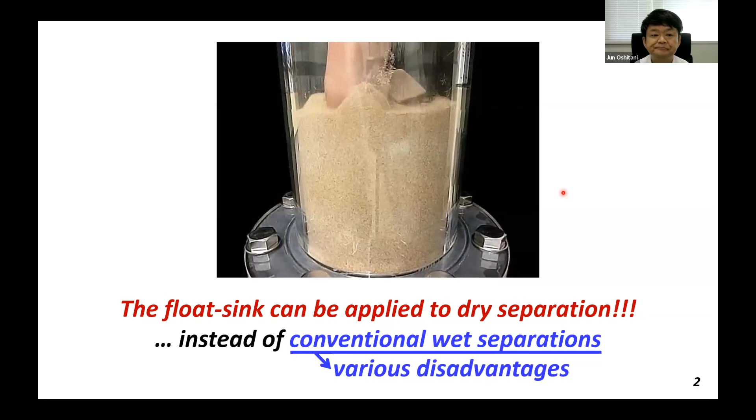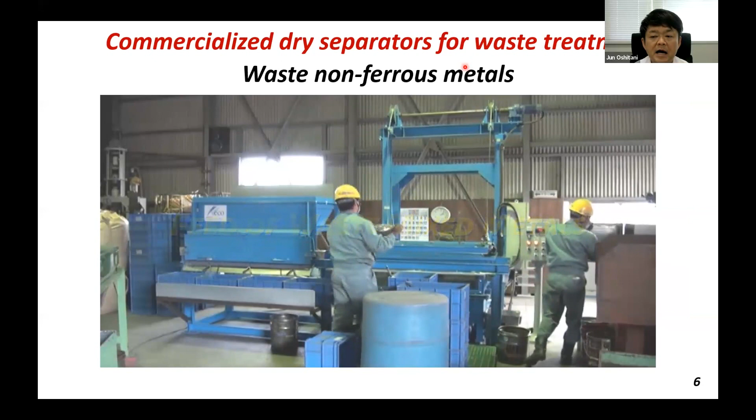Let me show you a movie of semi-automatic separators for non-ferrous mixed metals. To separate aluminum and copper zinc, they use black powder like this. What do you think this is? This is iron powder to make a higher separation density. The floated aluminum is recovered by hand, like a cooking chef. So this separator is relatively cheap.

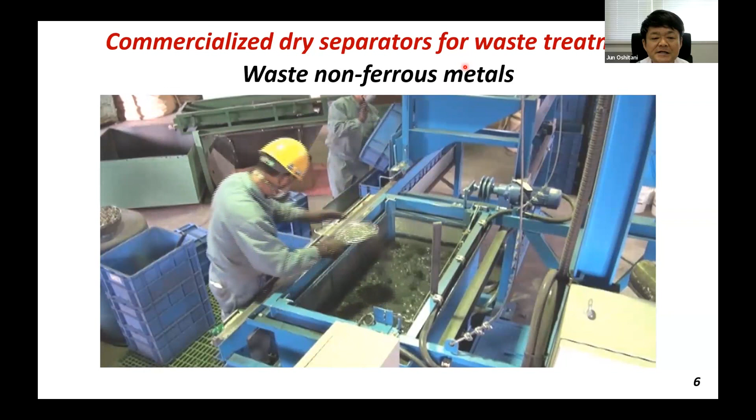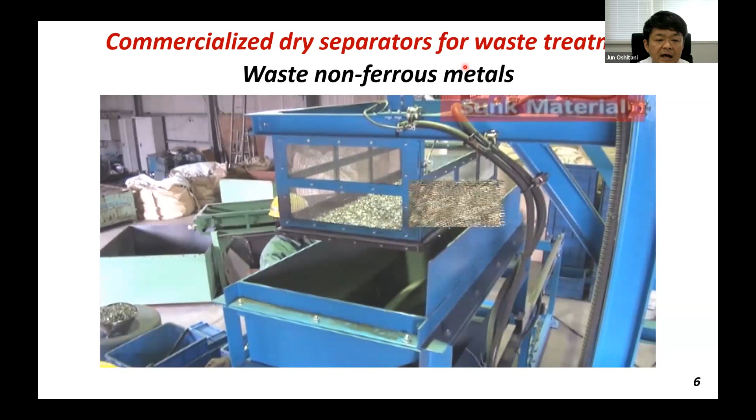This is the floated aluminum. For the sunk copper and zinc, a cage, a basket, is pre-installed at the bottom, and automatically lifted up, and the slider is moved by hand, and the bottom mesh plate is opened to recover the sunk materials. These are reused as materials.

Nagata Engineering is the partner company.

And we also applied the dry separation to mineral processing with George. We have collaboration since 2008. Actually, we met in 2005 in Terrigal, you know. Anyway, we're good friends for a long time. I visited Melbourne with my family, and George visited my city, Okayama, and we love karaoke.

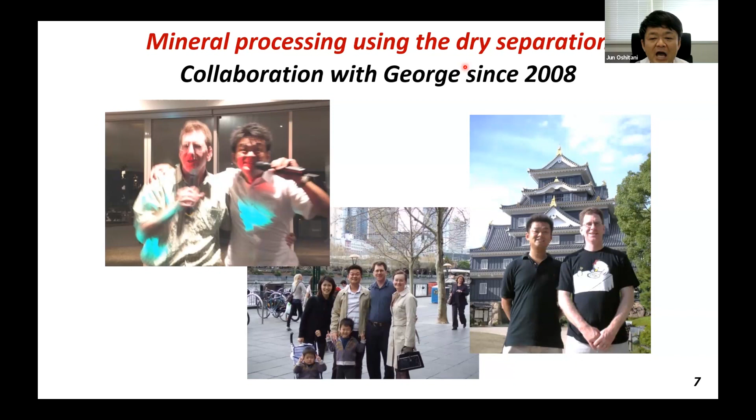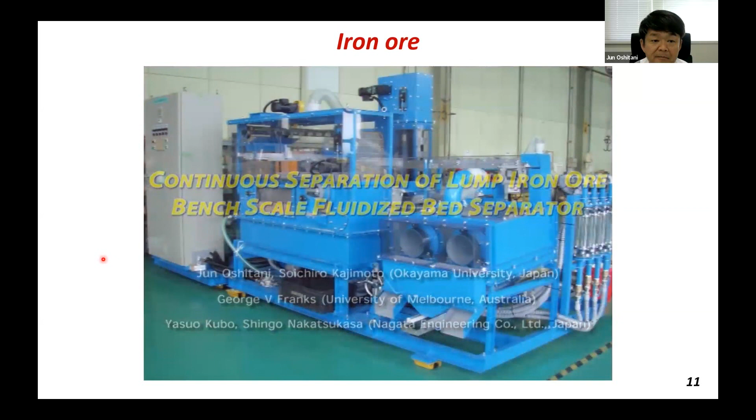I'll talk about it later. This is a bench scale dry separator for mineral processing. We got lump iron ore from an Australian big company and carried out the separation. This movie was made by partner company Nagata. This is a feed of iron ore.

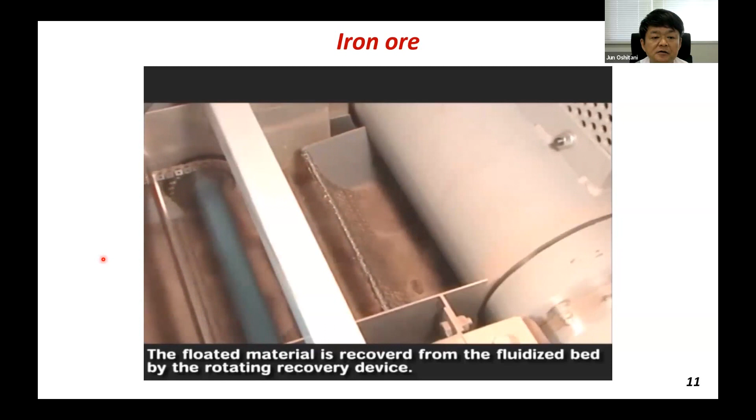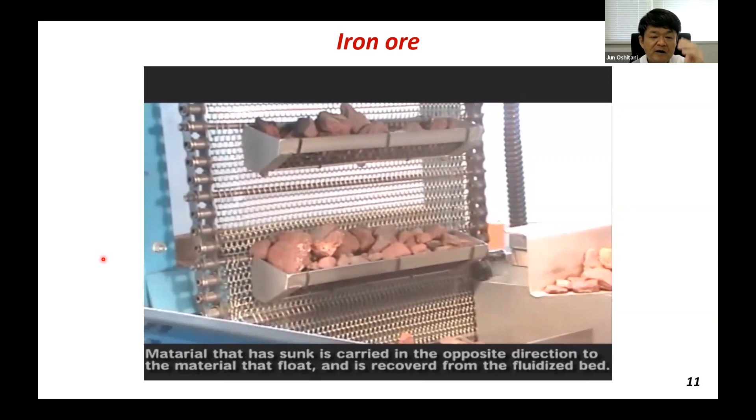Here we use a mixture of silica sand and zircon sand to adjust the separation density. The floated stones are recovered by the rotating basket. And the sunk heavy stones are recovered by a small cage. The cage moves at the bottom and partially moves at the wall. There are some powders attached to the stones, so they are removed by the trommel. These are the discharge of the separated ones.

We carried out the chemical analysis, and we found the separation efficiency is almost the same as that of conventional wet separation.

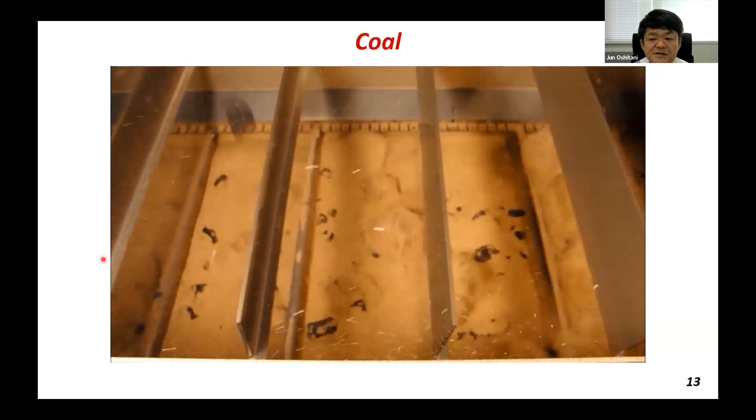We also carried out separation using lump coal. These are floating combustible coal recovered by rotating basket. And sinking silica stones are also recovered by the small basket and treated by the trommel.

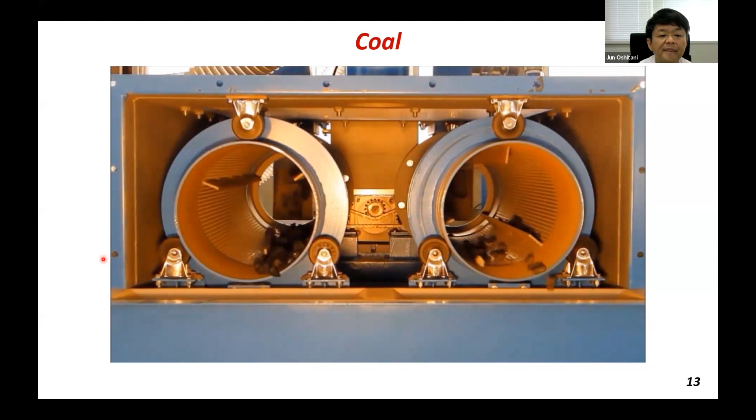These are the floaters and sinkers, separated enough.

Let me talk about our fundamental research entitled Float Sink of Large Objects in a gas-solid fluidized bed, different from that in a liquid. The float sink in the fluidized bed looks like that in water, so we had a question: is this based on Archimedes' principle? Our answer is mostly yes, but sometimes looks no.

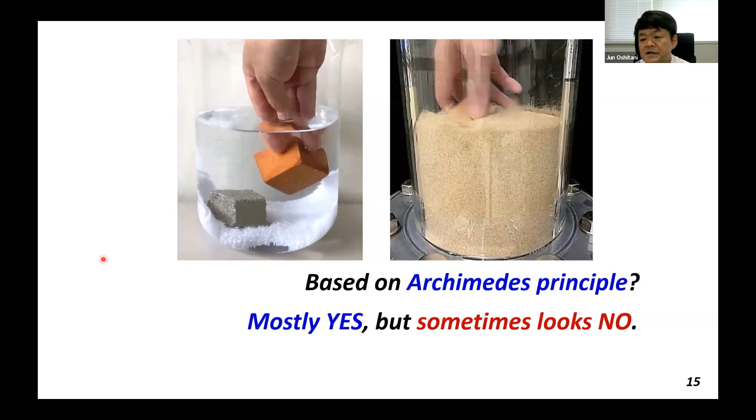Today, let me show you three interesting phenomena. The first is anomalous sphere sinking at the air velocity just below UMF. The UMF is minimum fluidization air velocity. So when the air velocity is above the UMF, as I've shown, the float sink occurs.

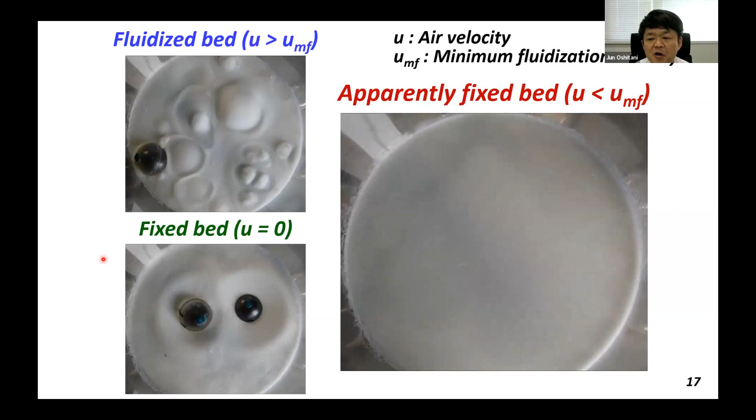Of course, it does not occur at a fixed bed. Here, it looks like a fixed bed, but float sink occurs. Air velocity is just below the UMF, so it is like an apparently fixed bed.

Very interesting, so we carried out more experiments to know the details. Glass beads were put into the container. The air was put through the bottom as U by UMF is 0.95, just below the UMF.

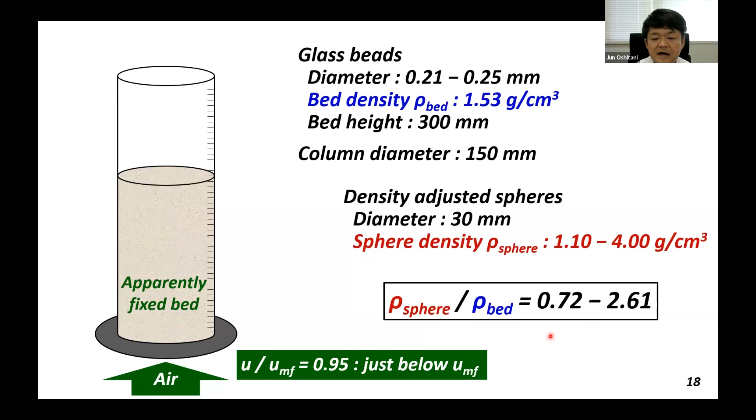Various density spheres are prepared. The density ratio was like this range. The sphere was put onto the bed surface like this. Video cameras are prepared, then the sphere sinking was recorded like this.

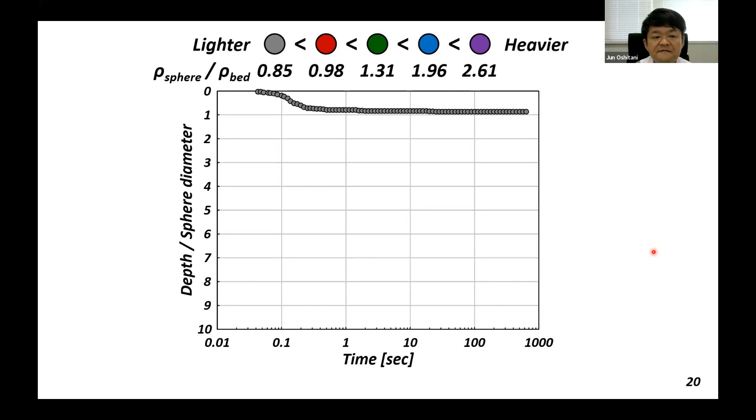And the time dependence was analyzed, 0 floating and 10 sinking. This is the result: light sphere gray floats and the heavy sphere purple sinks.

Blue and green: the depth becomes smaller with decreasing the sphere density. So red has to be between green and gray, but finally between green and blue. Surprisingly, a lighter sphere red sinks deeper than the heavier sphere green.

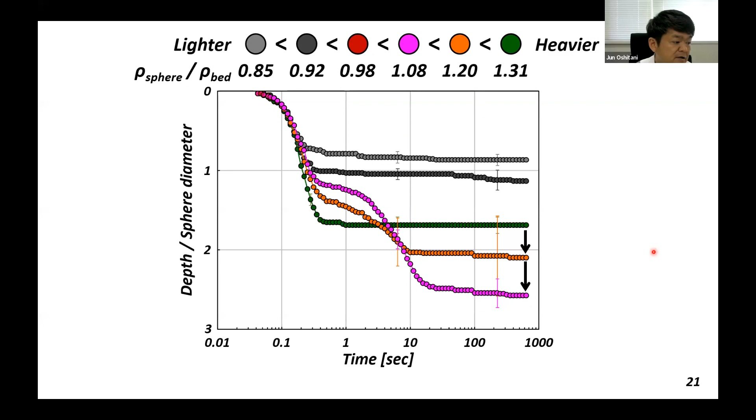We also carried out the experiments in the yellow region, light gray and heavy green. Light orange deeper, light pink deeper, and lighter red also deeper.

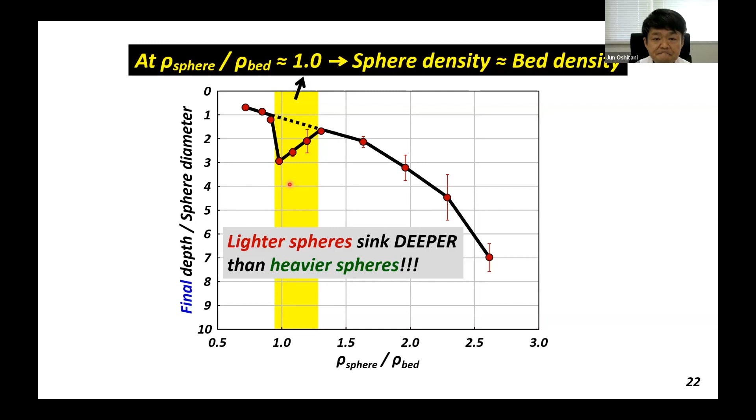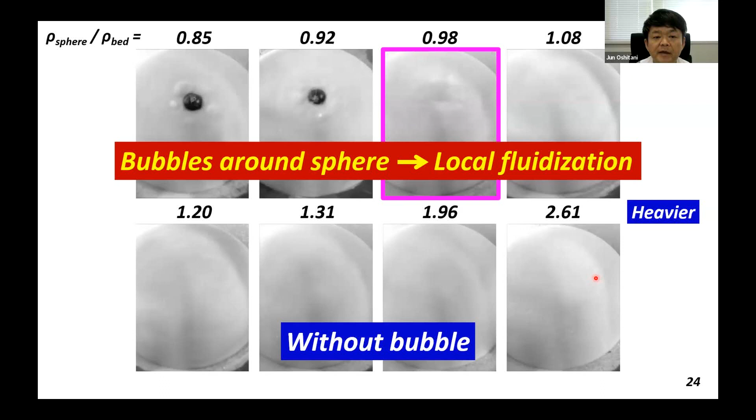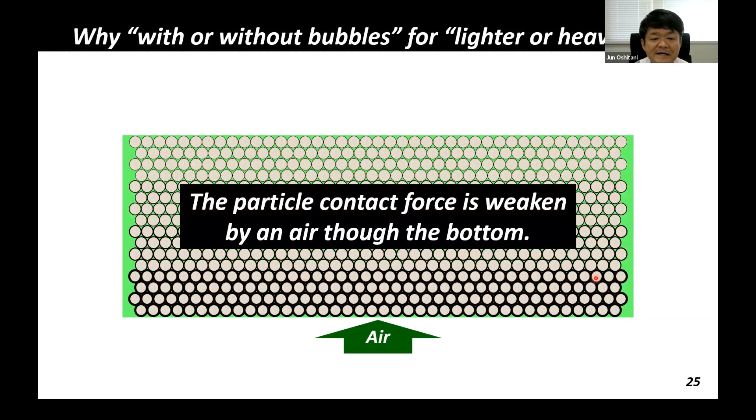Then we have a question: why with or without bubbles for lighter or heavier? Let me talk about the possible mechanism. This is the powder bed. Particle contact force is larger at the lower layers, but the force is weakened by air through the bottom.

In case of lighter sphere, the particle contact force is not changed. The air comes outside at the bottom and joins together. So here, the air velocity is larger than UMF, then bubbles are generated locally.

In case of heavier sphere, the particle contact force below the sphere is enlarged due to heavy weight. So the air goes up far from the bottom, and there is no local increase of air velocity, so bubbles are not generated.

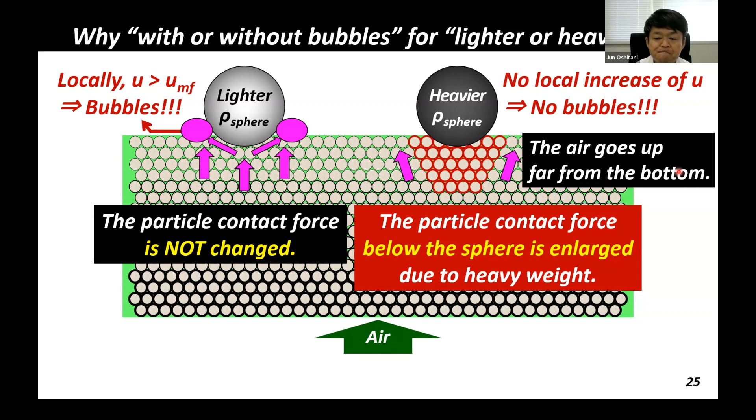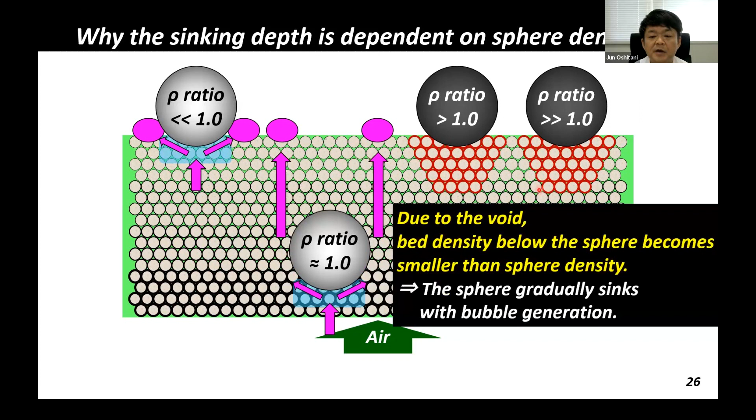But in case of density ratio around 1.0, due to the void, bed density below the sphere becomes smaller than sphere density. So the sphere gradually sinks with bubble generation. But the particle contact force is large at lower layers, so finally, the bubble generation and sphere sinking stop.

In case of heavier ones, the sphere sinks slightly without bubbles or sinks deeply by overcoming the particle contact force.

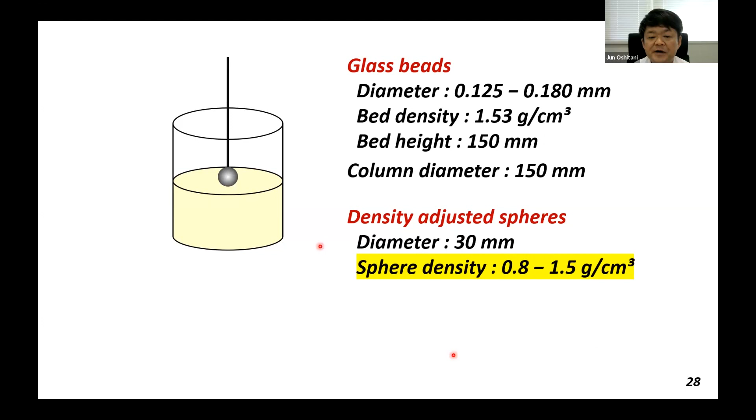The second is unstable sphere sinking at higher air velocity. Here, various density spheres were prepared, and glass beads were fluidized at U by UMF from 1.5 to 7.0, higher air velocity. After 3 minutes of the float sink, the normalized height of sphere was calculated like this.

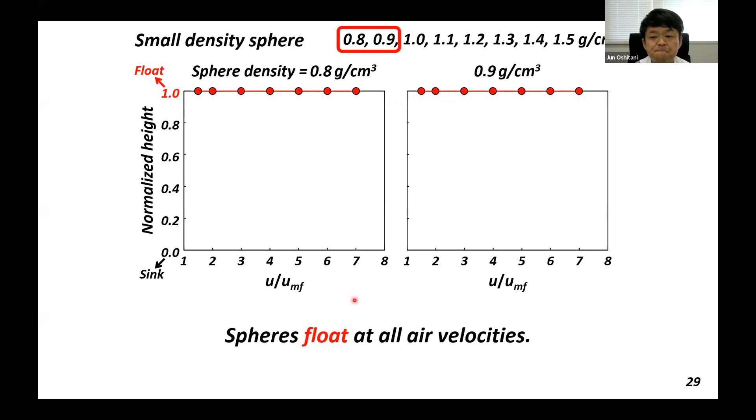These are the results: normalized height as a function of the air velocity ratio. If the sphere density is small, like 0.8 and 0.9, the spheres float at all air velocities. And if the sphere density is large, like 1.4 or 1.5, the spheres sink regardless of the air velocity.

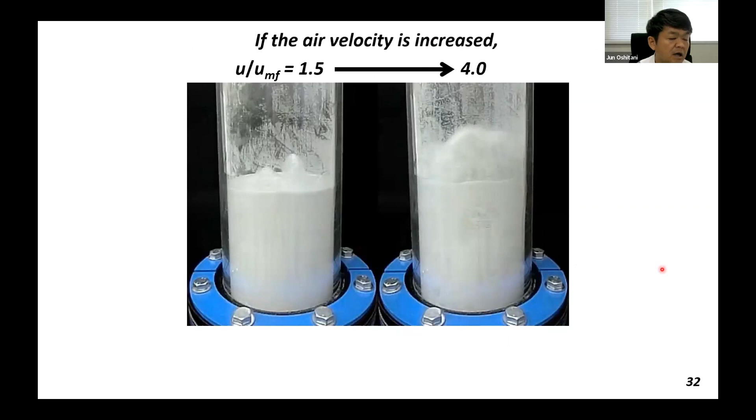But if the sphere density is middle, like 1.0 or 1.1, the sphere floats at lower air velocity but tends to sink as increasing air velocity. This is because if the air velocity is increased, the bed expansion occurs, so the fluidized bed volume becomes larger and the fluidized bed density becomes smaller. As a result, the spheres tend to sink as increasing air velocity.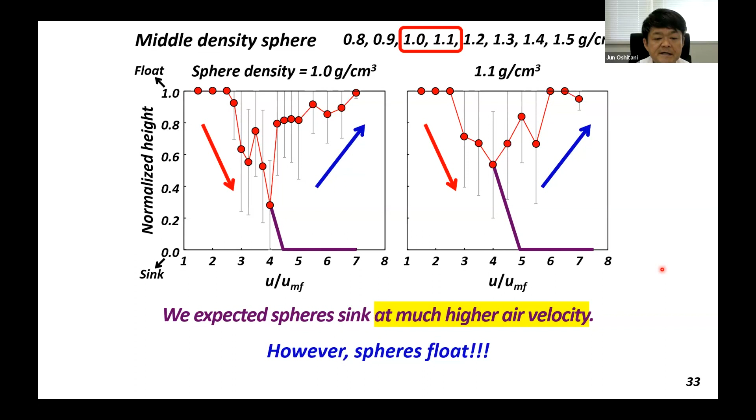So we expected the spheres to sink at much higher air velocities. However, as you see, spheres float. These are for density equal 1.2 and 1.3. Again, the spheres float at higher air velocity.

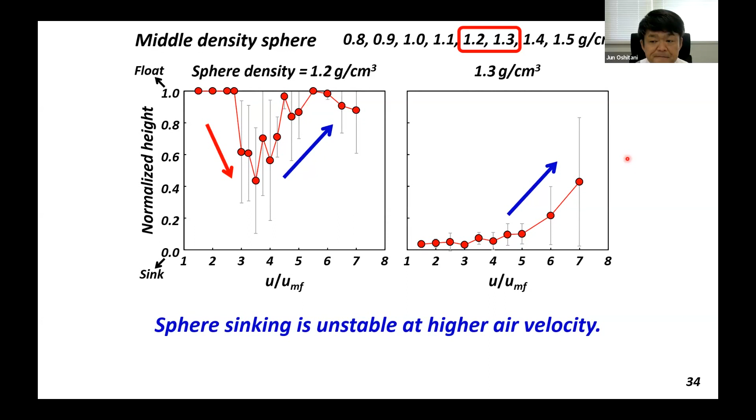So the sphere sinking is unstable at higher air velocity. As a possible mechanism, my colleague Tak, who is an expert in numerical simulation of the fluidized bed, says there are 3 forces working on the sphere in a fluidized bed: particle contact force, fluid force, and gravity force. The fluid force is important, especially the gas pressure gradient force.

In gas flow through a dense particle bed, a large pressure gradient due to particles, a background pressure drop, exists like this. His model is designed to capture the pressure gradient due to particles around the sphere. So this is similar to Archimedes' buoyant force.

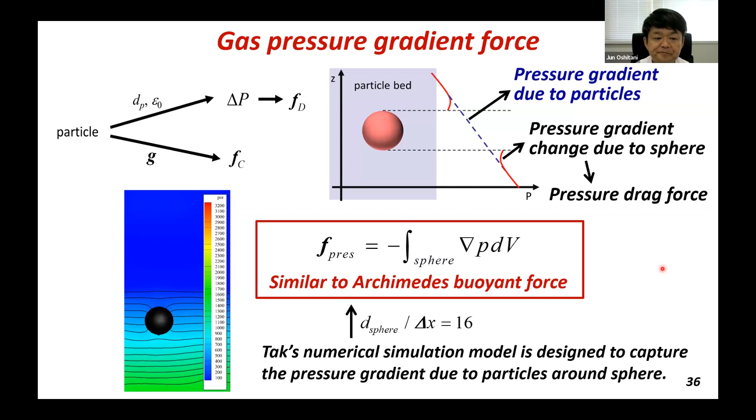The third topic is many body effect on floating and sinking in a fluidized bed. This is a most recent result, so George, it's a first for you too. In the previous experiments, only one sphere was put onto the bed surface, but here the number of spheres was changed from 1 to 10.

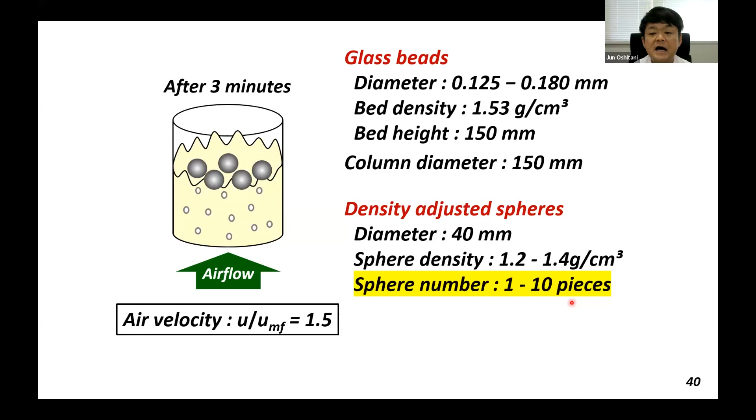The air velocity was fixed at 1.5, and after 3 minutes of float sink, the normalized height of the spheres was calculated. This is the average normalized height as a function of number of spheres.

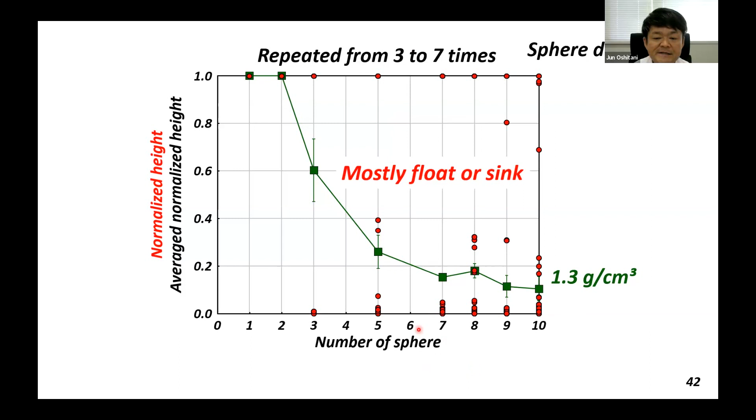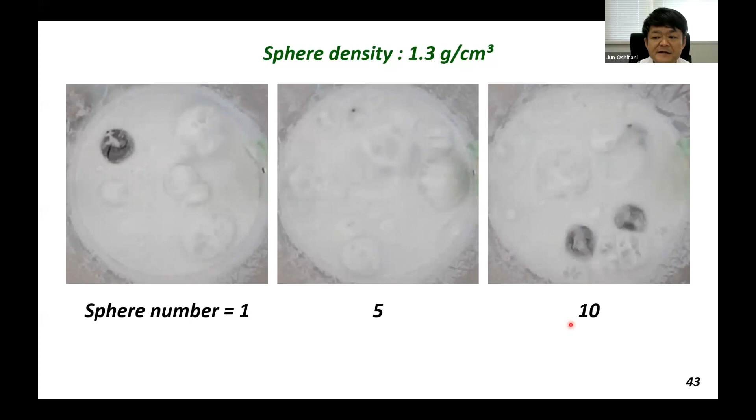The experiments were repeated from 3 to 7 times at each number. These are our results: the spheres mostly float or almost sink, not scattered, in the fluidized bed. These are the movies. In case of 1 sphere, it is always floating, but in case of 5 and 10, some spheres are sinking. This might be a kind of many body effect.

Float sink in the fluidized bed still hides mysterious phenomena, so we'd like to continue enjoying them. All right, let me change the slides. Just a moment.

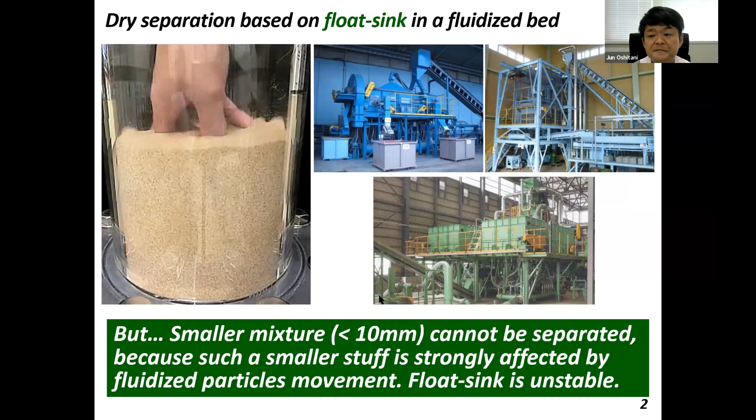All right, next topic is density segregation in a fluidized and/or vibrated powder bed. As shown, we got good results with float sink separation, but unfortunately this has a weak point: smaller mixtures, like less than 10 millimeters, cannot be separated because such small stuff is strongly affected by fluidized particle movement, so the float sink becomes unstable.

Then we added particle vibration to the fluidized bed to enhance density separation. For example, this is the separation of wood chips and gravel in construction waste residues. The mixture is well fluidized with the vibration.

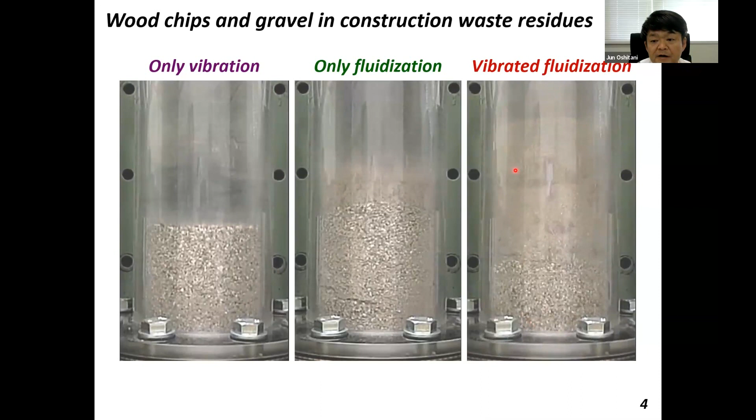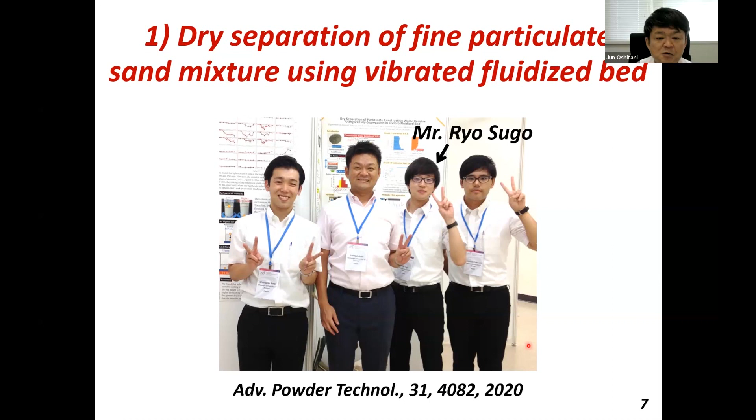So we tried dry separation using a vibrated fluidized bed. The sand mixture of this size range was prepared and used. This is a vibrated fluidized bed. It has a cylindrical column with a diameter of 100 millimeters. Airflow is put in from the bottom, and the superficial air velocity U was varied by an airflow controller.

There are two vibration motors to generate the vertical vibration. The amplitude A was varied by tuning unbalanced weights in the vibration motors. The frequency F was controlled by an inverter.

Vibration intensity gamma, the ratio of vibration acceleration and the gravitational acceleration, was calculated like this, using the amplitude A and the frequency F.

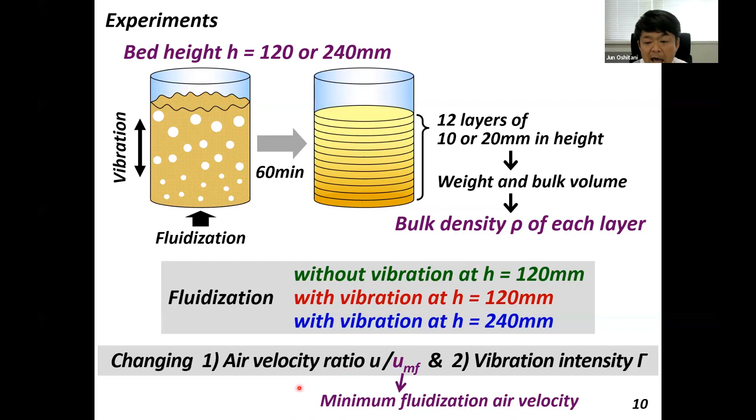At first, the effect of air velocity ratio on the density segregation. These are bulk density at each layer given without vibration, meaning only fluidization, at various air velocity ratios. As you see, the density is almost the same regardless of the air velocity ratio and the layer number. That means density segregation is not induced by only fluidization because the density difference is too small.

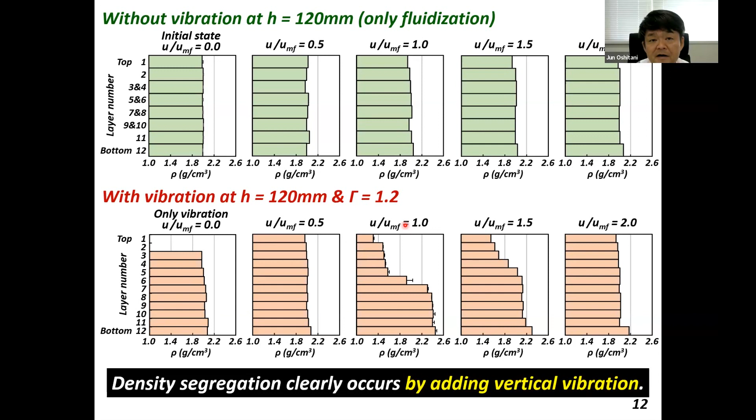These are with vibration. When the air velocity ratio is 1, upper layers density is around 1.4 and lower layers density is around 2.4. So the density segregation clearly occurs by adding vertical vibration to the fluidized bed.

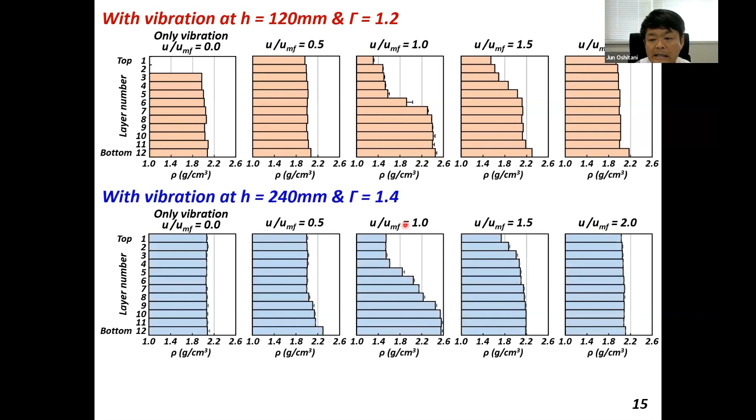Again, these are the results at 120 in height, and these are at 240. We got similar results. The clear density segregation occurs at the same air velocity ratio of 1.0.

These are the density at each layer as a function of the air velocity ratio. The density at upper layers decreases and returns to the initial value, and the density at the lower layers increases and returns to the initial values. Similar results are obtained at 240 in height.

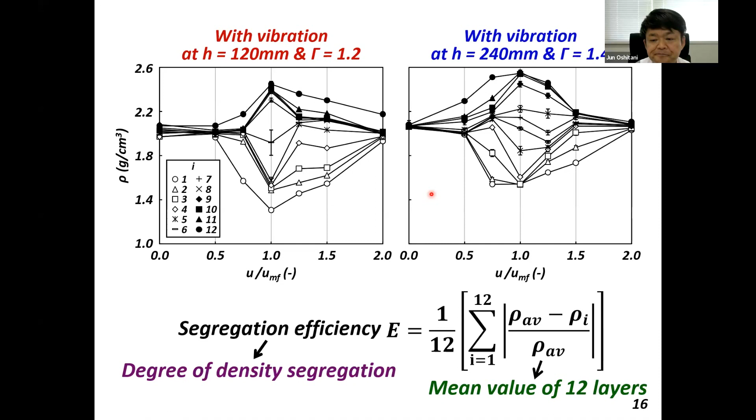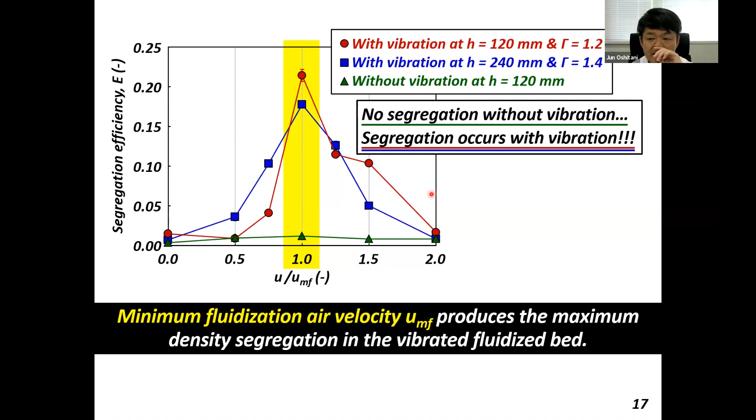Based on this data, we calculated segregation efficiency, degree of the density segregation, using this equation. This is the segregation efficiency as a function of the air velocity ratio. Again, no segregation without vibration, but segregation occurs with vibration. And the interesting point is that the minimum fluidization air velocity UMF produces the maximum density segregation in the vibrated fluidized bed.

Next is the effect of vibration intensity on the density segregation. The experiments were carried out at the air velocity ratio 1.0. With increasing vibration intensity, density segregation occurs and disappears, and again occurs and disappears.

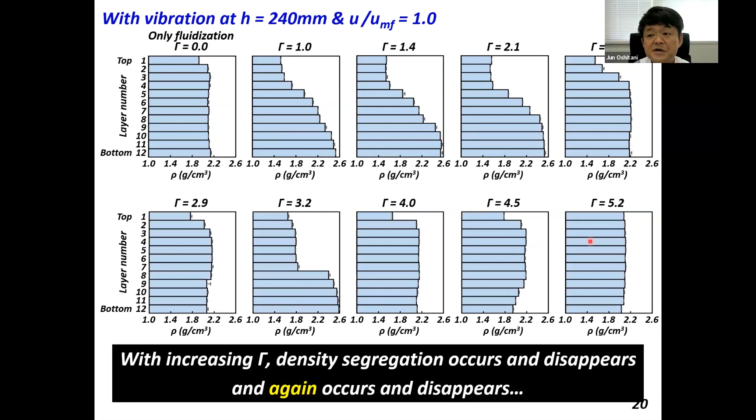At 240, the density segregation occurs and almost disappears, and again occurs and disappears, surprisingly. So the segregation efficiency goes up, down, and up, down, and slightly up. At bed height 240, the same pattern of going up and down is repeated, but the peak points shift to the right side at 240.

So possibly this is a kind of resonance phenomenon. Degree of the density segregation is resonant with the vibration intensity gamma, and the resonance frequency is dependent on the bed height. In general, the effect of vibration is discussed with the vibration intensity gamma, but it contains two parameters, amplitude and frequency, so we are interested in showing the result with the two parameters.

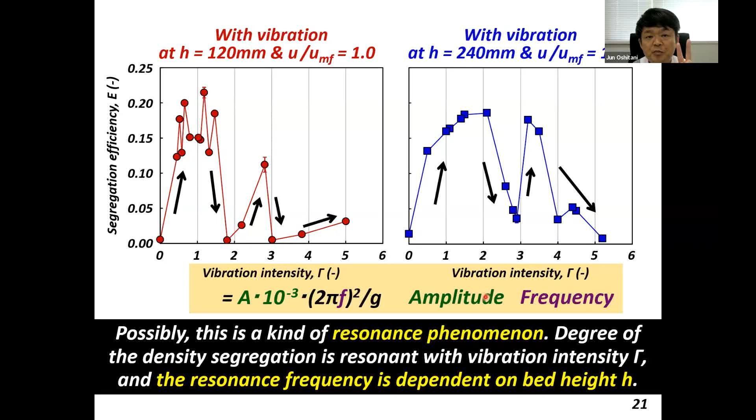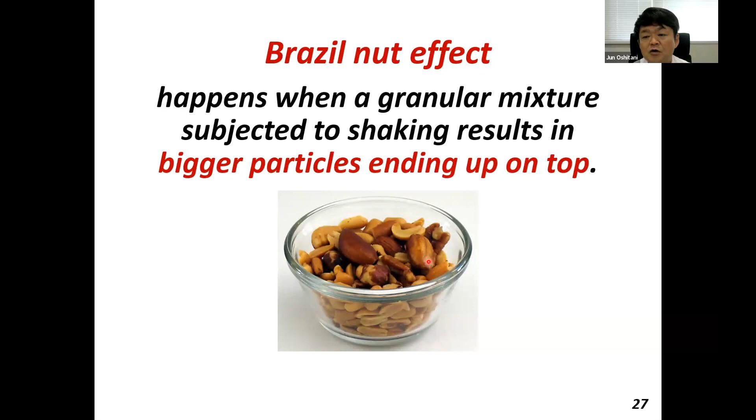We also studied the dependence of density segregation on air velocity and vibration intensity. At first, conversion from reverse segregation to normal segregation. Do you know the Brazil nut effect? It happens when a granular mixture subjected to shaking results in bigger particles ending up on top. This comes from size difference.

In case of a powder mixture of the same size but different density, it is well known that reverse segregation occurs with vibration only. Larger density particles go up and smaller density particles go down. But in case of vibration with airflow, as I showed, normal density segregation occurs. Then we simply had a question: at which air velocity does reverse segregation convert to normal segregation?

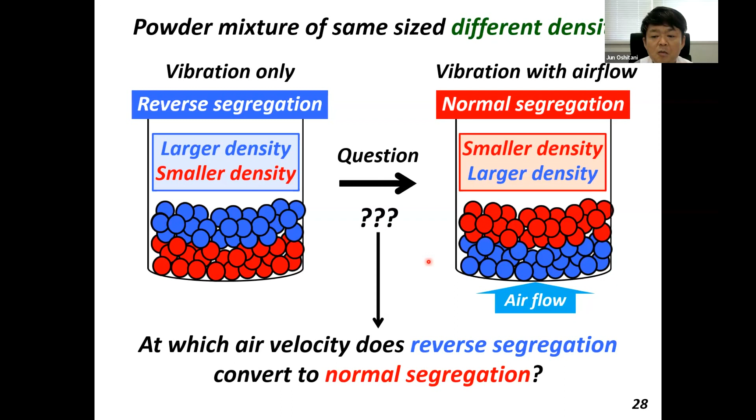So we did experiments. We prepared two mixtures of glass beads and stainless steel powder or iron powder, of the same size but different density. The mixture had a 50% bulk volume fraction. The vibrated fluidized bed is the same as the previous topic. The vibration intensity was 4.4 or 3.4. We followed a similar procedure for the experiments. After 10 minutes, 10 layers were recovered and the bulk density was calculated with the weight and volume, and then the volume fraction of heavier particles was estimated with the bulk density.

This is the result of mixture A. With only vibration, or at smaller air velocity, upper layers contain heavier particles, so reverse segregation occurs. If the air velocity increased, lower layers contain heavier particles, so normal segregation occurs. And at larger air velocity, the particles are mixing.

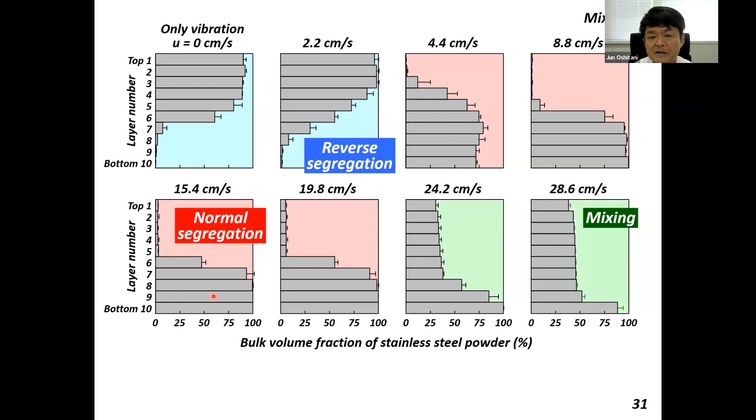These are the movies. Oh, it doesn't work, just a moment.

Oh, perfect. It's not easy to see, but the light colored glass beads move to the lower parts at only vibration and smaller air velocity, you see? So reverse segregation occurs.

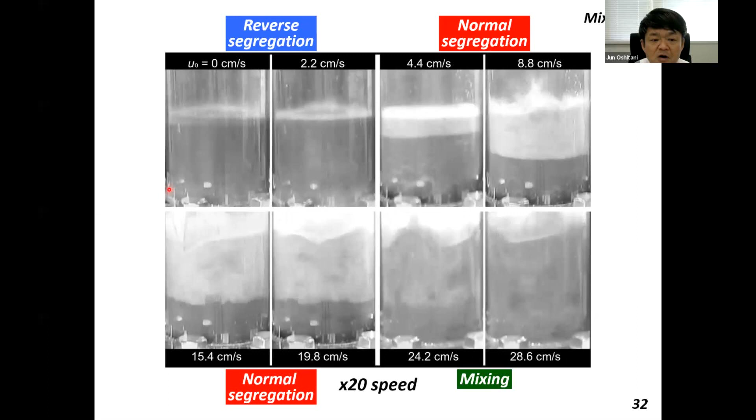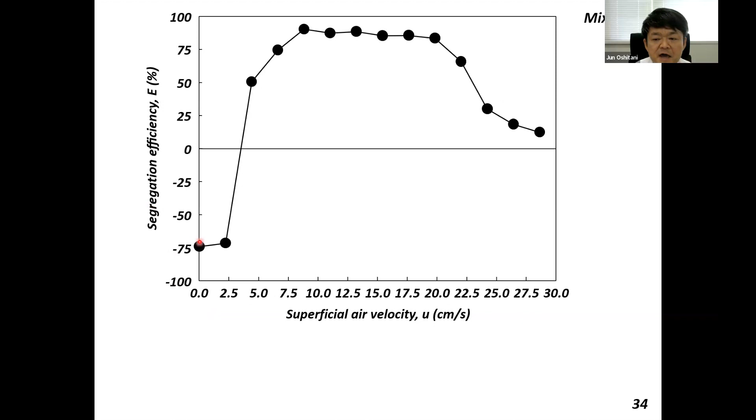Then we got the segregation efficiency using this equation. This is the segregation efficiency as a function of the air velocity. The minus values show reverse segregation, and the plus values show normal. The results are reverse, normal, and mixing, and here is the conversion from reverse to normal.

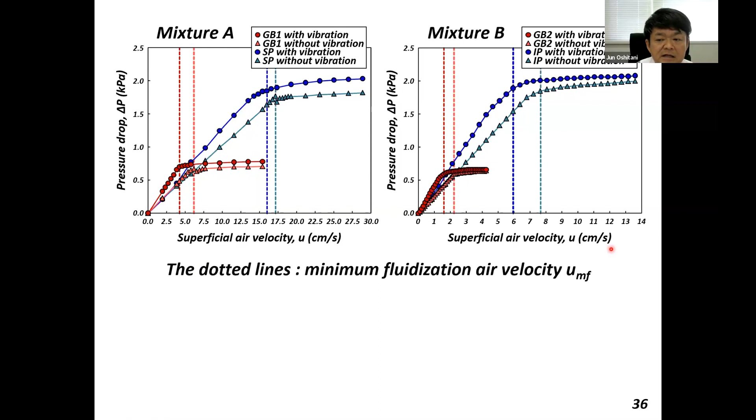These are pressure drop as a function of air velocity, and the dotted lines show UMF. There are two points: UMF of lighter particles, glass beads, is less than that of heavier particles, iron powder and stainless steel. And the UMF with vibration is less than that without vibration.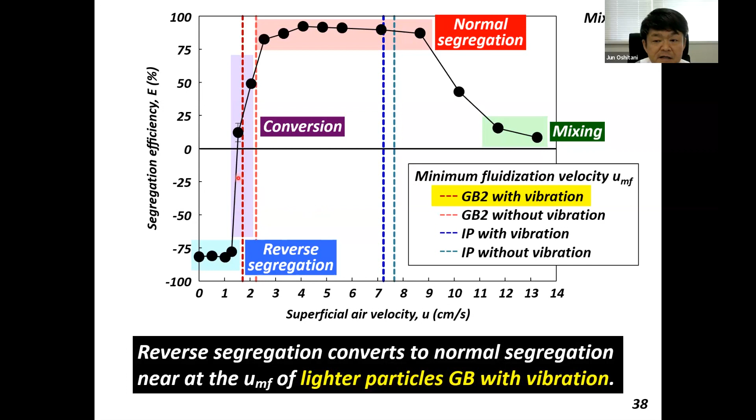They proposed the possible mechanism of reverse segregation. I'm sorry, it's not easy for me to make the animation, so just sentences here. They say that vertical vibration without fluidization induces cyclic compaction and decompaction of a powder bed with an oscillating airflow in the powder bed.

Air drag is generated due to the pumping of air in combination with the cyclic compaction and decompaction. The difference in acceleration from the air drag causes the heavier particles to move upward, resulting in reverse segregation.

Then we considered the possible mechanism of the conversion from reverse to normal. If air is vertically injected into the vibrated powder bed and the velocity reaches the UMF of lighter particles with vibration, the lighter particles begin to be fluidized.

The air pumping effect is weakened and the difference in acceleration from the air drag becomes negligible. As a result, the reverse segregation does not occur. Above the UMF, the heavier particles sink in the fluidized bed of the lighter particles based on density difference, resulting in normal segregation.

George, is the time okay? Yeah, you'll finish up in 5 minutes or so. Yeah, okay, so quickly, yeah.

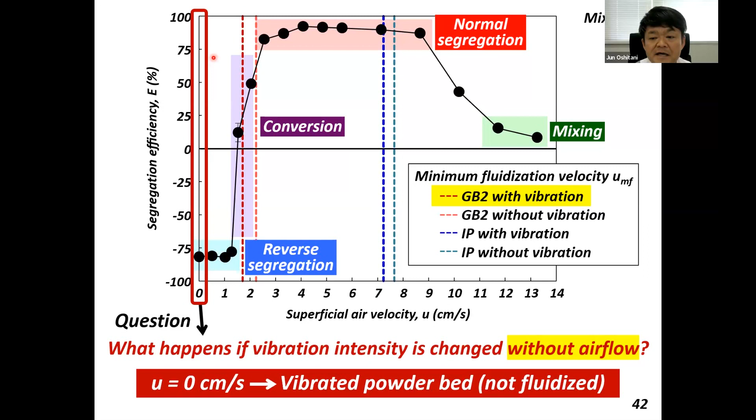This is the result, last results. Then we had the question: what happens if vibration intensity is changed without airflow, at air velocity of 0? I mean the vibrated powder bed, not the fluidized bed.

It was reported that not only reverse segregation, but sandwich segregation also occurred in the vibrated powder bed. Larger density particles are sandwiched between upper and lower smaller density particles.

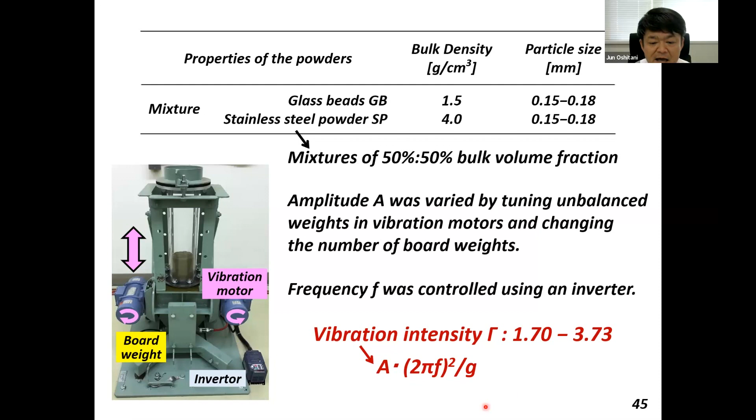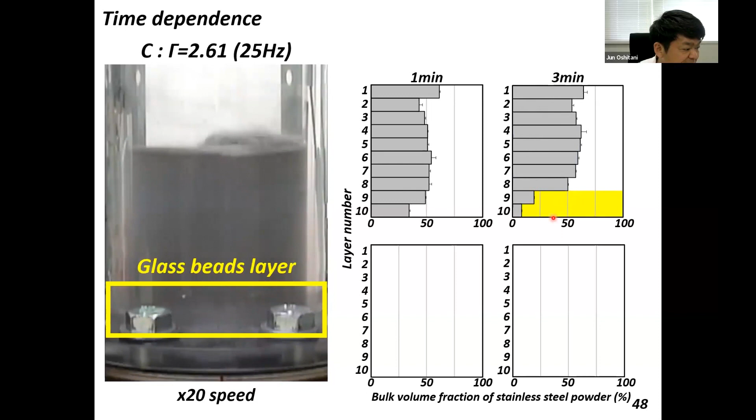At 1 minute, still mixing. Then the glass beads layer appeared at the lower parts. And the glass beads powder layer also appears at the upper parts. Finally, at 10 minutes. Sorry, it takes time, so quickly.

Before the experiments, we expected the simultaneous appearance of glass beads layers, but that's not true. The lower layer appears first and the upper layer appears later.

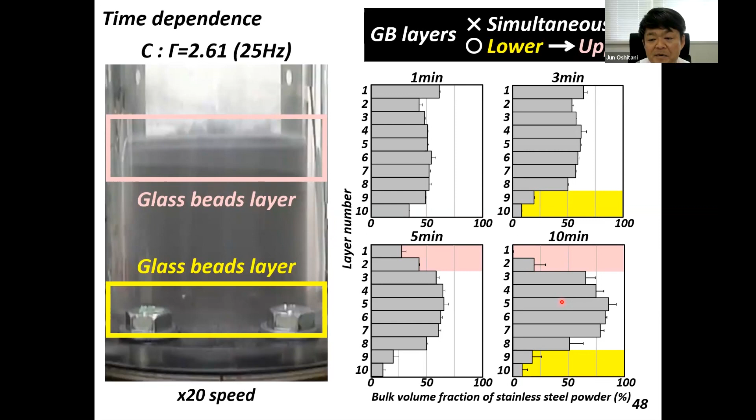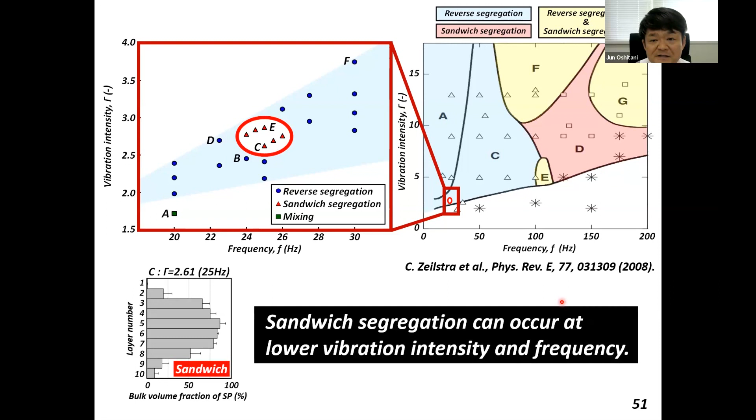This is the map they showed, and this is our result. So our result indicates that sandwich segregation can occur at lower vibration intensity and frequency. All right, let me skip the possible mechanism.

Sandwich segregation also occurs at a lower frequency in our study.

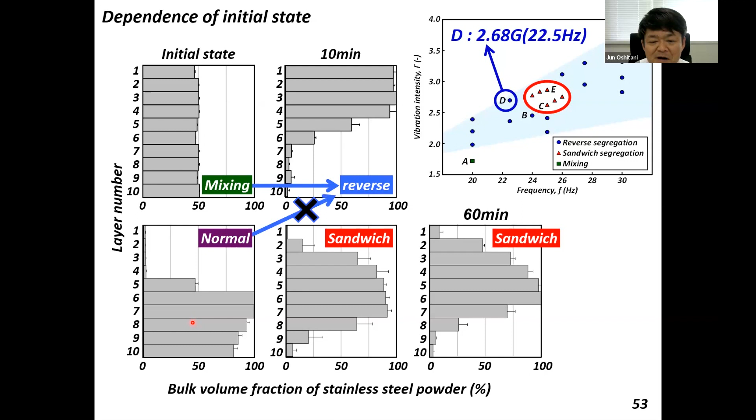So mixing converts to reverse, but normal converts not to reverse, but to sandwich. Why? Anyway, as a conclusion, density segregation in the vibrated fluidized bed can be used for dry separation. However, density segregation is still mysterious and complicated to understand.

All right, that's it. Thank you for your attention.

Thank you so much, Jun. Really nice talk, very interesting. You put a big effort in, a lot of video animation and such. It's much appreciated. So we have some time for some questions, and I'm sure Kevin and Dusan and perhaps others have questions. Kevin, do you want to go?

Well, thank you very much, really appreciate your presentation. Everybody was listening to every single word with fascination. Everybody was hanging off every word you were saying with fascination. Thank you so much, thank you so much.

I assume you're aware of all the work that was done on liquid fluidized beds in the 1980s with inversion in a fluidized bed, where at low fluidization rates you can have very fine, dense particles sitting below large, low-density particles. Have you looked for some analogy with respect to that earlier work?

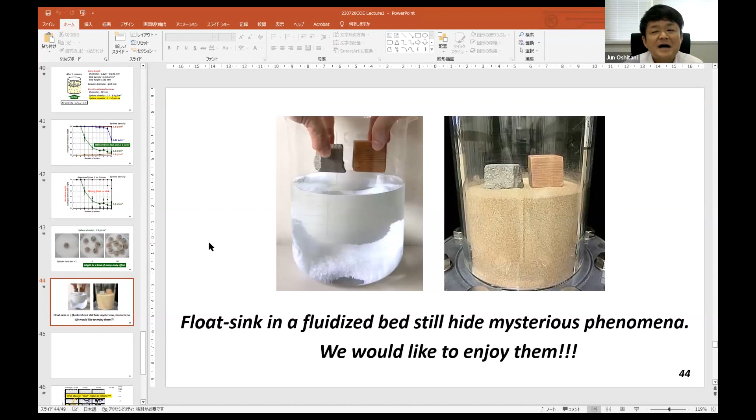Thank you so much. Actually, I'm an engineer, so I'm just a separation guy. But I really enjoy the physics, granular physics. So I'm very happy to hear that. Thank you so much, Simon.

Yeah, and I agree. Jun and his team have done some fantastic, very precise and very detailed experimental investigation, which without that level of detail and precision, you might not have seen a lot of these phenomena. You think it's very simple to begin with, but there's so much complexity in there, which leads to these very interesting questions. It was also a great example there of the plot. You had a plot where you had some data that showed a nice trend line, but when you zoomed in, there was actually this big deviation from the trend line.

So it shows you that nature is not always a straight line phenomenon. Sometimes there are weird and wonderful deviations. I thought that was to do with a phase change, it was all happening around UMF. So I guess it shows you, look closely when there's a system phase change. You are talking about this one or another one? Yes, this one, I think. So when there's a phase change, very intriguing, very interesting.

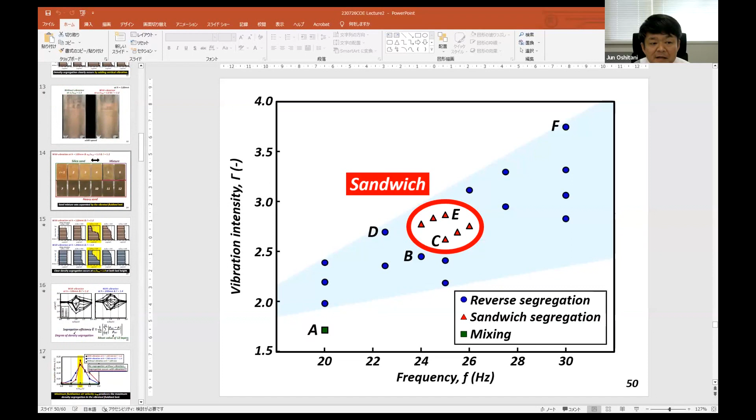Thank you, I have a question about your vibration intensity parameter. Is that your own idea, or does it come from somewhere else? Because Dusan, who works with me, has been adopting that parameter recently. I think it's original. We decided, actually with the mineral sand we couldn't separate, because I first used a very large intensity like 6.0, 5.0, nothing worked. So I decided to reduce the intensity, and then luckily it separated. It's our history.

So actually, I didn't read the paper, I just decided with my students. What's the particle size in that slide? This particle size is around 100, 63 to 125.

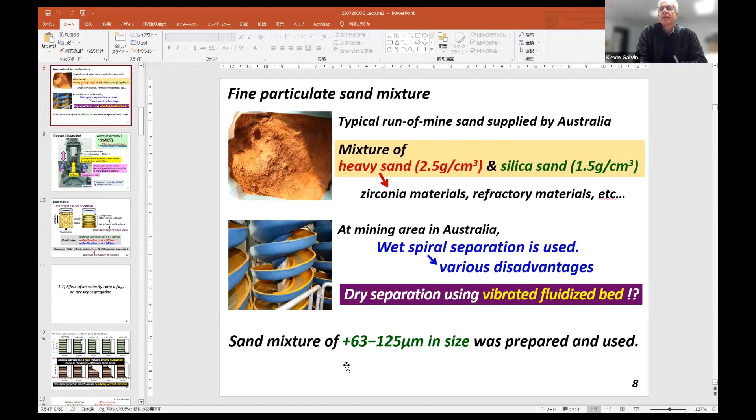Thank you, Jun, for a wonderful presentation. Just a quick one: have you considered, or do you think you will be considering, different modes of vibration, not just vertical? In our device we can only change the amplitude and the frequency. So by mode, I mean not just vertical, but different phase shifts and things, having vertical and horizontal or just horizontal vibration. We also did horizontal vibration, almost the same separation efficiency, but vertical is a little bit better. I ask because we've been working on a device that uses a combination of vertical and horizontal vibration, in addition to fluidization, and we're seeing some different, perhaps additional, complexities to what you've presented, and mysteries. But thank you, I became familiar with some of your work doing an overview of this kind of field, so it's very good for me to get this information from you firsthand. Thank you. Dusan, I think we've got a few more papers to cite.